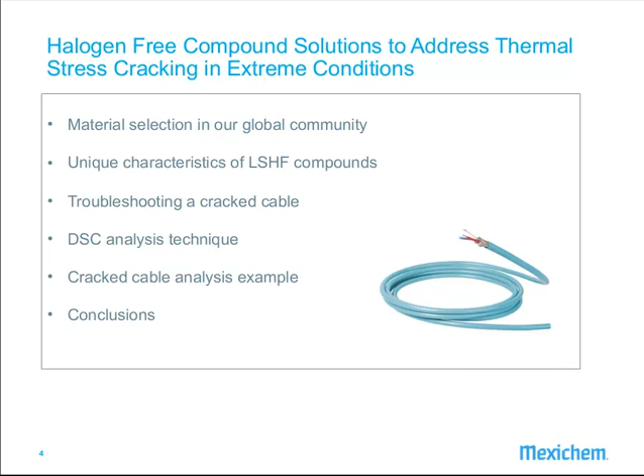So let's get started. Material selection. As all cable manufacturers are well aware, there are many global technical requirements, test standards, that the cable they're trying to make will have to conform to. These include British standards, Norwegian NEK standards, US Underwriters Laboratories, and London Underground, LULs, to name a few. There are usually similarities between these standards, and in some cases, harmonisation of standards, such as the European norms, EN specifications, are in place.

So I'm just trying to get things to move on.

For the cable manufacturer, there is a whole host of materials that could be selected for the cable compound application, such as PVC, elastomers, engineering polymers, and the subject of today's presentation, halogen-free compounds and others. Some of these materials, such as low smoke halogen-free compounds, are unique in the way they behave, and traditional or available equipment and processes may not be enough or even capable to fully realise the potential of that selected material's properties. Thus, understanding the nature of the chosen material is fundamental to fully optimise its properties.

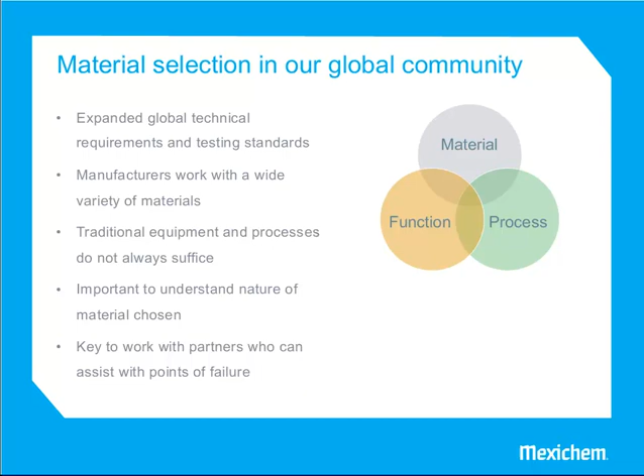Mexichem believes it's very fundamental to work with partners and suppliers who can assist with points of failure. After the title of this presentation, I would like to focus on low smoke halogen-free compounds. Now, we know that these materials do meet a whole host of global fire test requirements and other test criteria. They can be developed to match the performance of other materials such as PVC in terms of, say, processability and flexibility.

Depending on the end use of the environment that the low smoke halogen-free cables are chosen for, you have to choose a high performing compound to meet certain applications where they're going to be installed in arid or humid spaces. For such environments, these formulations must be robust enough to meet the requirements.

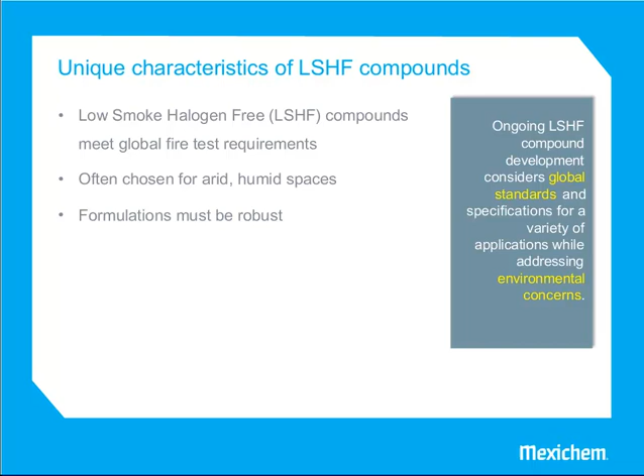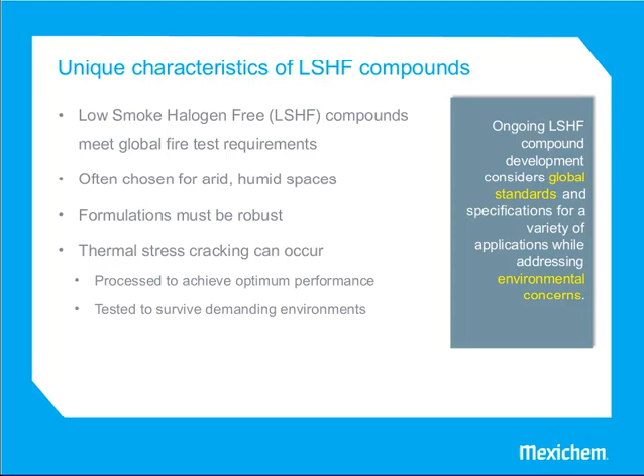One particular concern or requirement will be to address any thermal stress cracking concerns. So choosing a compound with improved thermal stress crack resistance performance is very important. And of course, all these cables, such as halogen-free compounds, will have to be tested to ensure survival in these demanding environments.

So for cables to be installed in extreme harsh environments where cracking could be a problem, the choice of the material, the compound formulation, is very important. That is, the material chosen must have property performance to satisfactorily withstand the extreme conditions that they need to perform in.

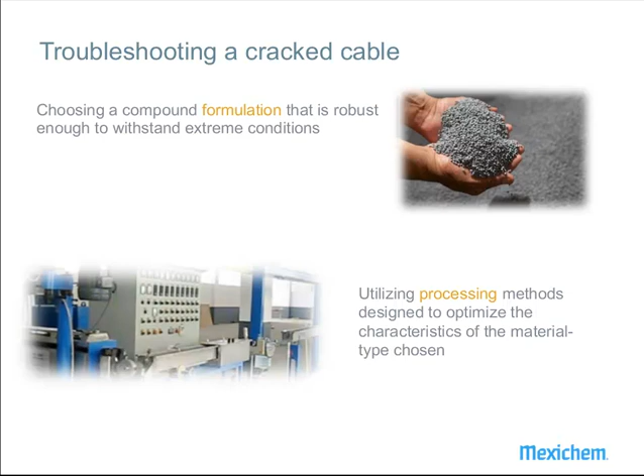Having chosen the best suited grade, a high performing grade, the manner in which these materials are processed is of key importance to be able to achieve the optimum performance of that cable in the field. So it's the right material to meet all the criteria of the end application, but the process method has to be optimized to the characteristics of that compound. So let's just discuss this point further.

Low smoke halogen-free compounds are generally highly filled with metal hydrates, flame retardants, so your aluminium trihydroxides and your magnesium hydroxides and calcium carbonates maybe. In the main, these low smoke halogen-free compounds will contain or be based on semi-crystalline polymer systems. Thus, halogen-free compounds will not behave like amorphous materials. This is a significant point in that they will have a much smaller processing window when you compare them with PVC.

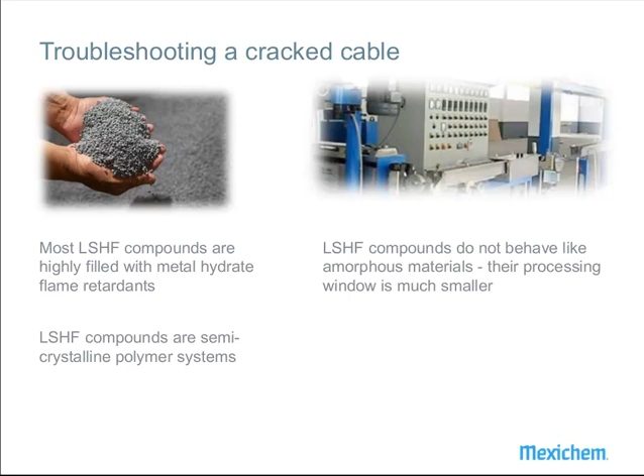So, let's recap what is needed for a material for a cable that is going to be used in the harsh environment. Well, cables installed in this environment will more than likely be designed to consist of steel wire armouring or steel wire tape wrap.

These cables will be installed in harsh and hot environments with temperatures reaching 40 to 50 degrees C. And often they will require conformance to many British Standards regulations, which often have to meet a hot pressure test at 90 degrees C. So we're talking, i.e., cable specifications such as LTS1 and LTS4 types as described in BS 7655.

So to ensure the material chosen is able to withstand the harsh environment described, one test, such as this one shown here, employed by Mexichem, is thermal stress crack resistance. This test uses the same equipment and preparation method as environmental stress cracking, with the exception that instead of placing the prepared samples in detergent, in Igepal, they are placed in ovens at different temperatures and the specimens observed over a period of 14 days to determine the temperature where no cracks occur.

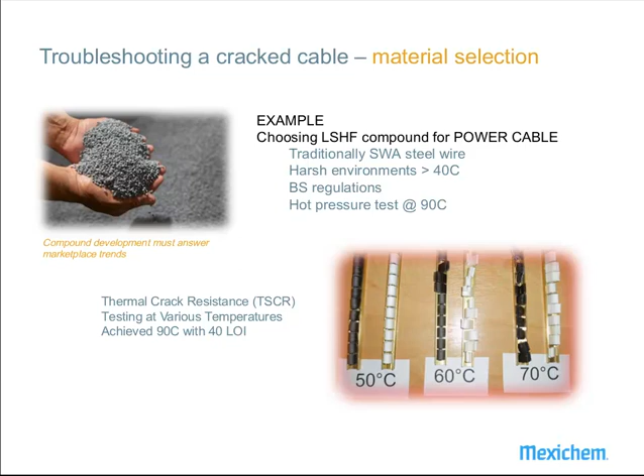So moving on to processing techniques. As we mentioned, the halogen-free compounds will be semi-crystalline in nature. Because they are semi-crystalline in nature, they can develop frozen-in stress if cooled too quickly or too rapidly in the cable making process.

What is happening is that the sheath or jacketing is drawn out to cover the core, and it is prevented from shrinking back and thus not attaining equilibrium. That is, the polymer is not allowed to obtain the crystallinity it wants to achieve. The stress level in the jacketing sheathing will then be greater than the strength of the polymers, which leads to cracking. In other words, equilibrium is prevented by the lack of chain mobility at temperatures below its melting point.

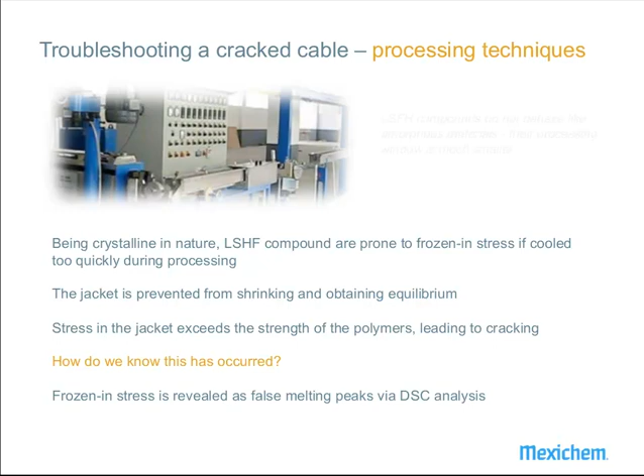You might ask, how can this be determined? How do we know that frozen-in stress is occurring? Well, we believe that frozen-in stress can reveal itself as false melting points and peaks using a DSC analysis. DSC analysis is a differential scanning calorimetry thermal analysis technique.

We have found a process of heating the cable material beyond the melting points of the polymer, then cooling it at a very slow rate to ensure equilibrium, and then doing a reheat. The graphical representation of the cycles will reveal differences between initial and subsequent heat cycles. These differences indicate that changes or optimization need to be made to the processing technique.

With the low smoke halogen-free compound, we believe achieving equilibrium during the processing would lead to cracking in the field being avoided.

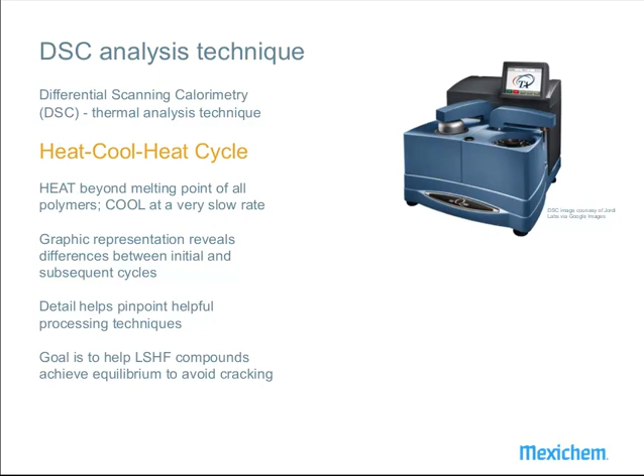I would now like to go through an example where this analysis has helped us to work with our customers or cable manufacturers to obtain good performance in the field. Our analysis was done on 3 cable samples. Cable 1 is a good cable with a small diameter and thin wall.

This cable has been consistently good in the field and no failure points have been raised over 4 years of using this cable's size. Cable 2 is a good cable again, but this time it's a larger diameter with a thicker wall. No cracking issues have been reported with this one. Cable 3 is the same cable design as cable 2, but in this case there was a failure point raised with this cable.

Here at the bottom of this slide, I have shared with you the test method that we use for our DSC analysis. We heat a piece of the jacket from room temperature to 200 degrees C at a rate of 10 degrees C per minute. We then slowly cool it at a very slow rate from 200 to minus 25, moving at 5 degrees C per minute.

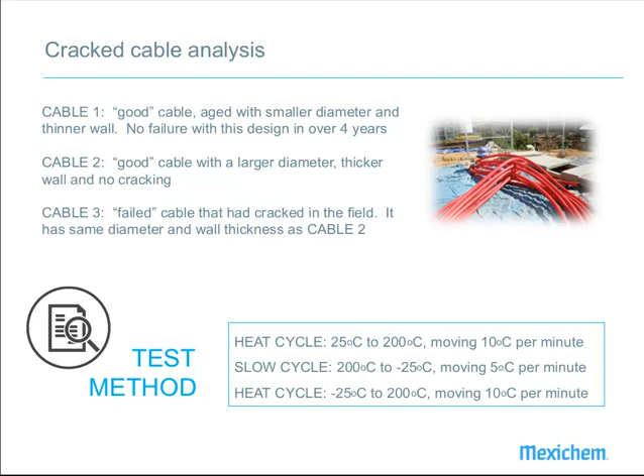This slide shows the graphical representation of the DSC method on cable 1. The blue dashed line is the first heat cycle, the green line is the cooling cycle, and the red solid line that you see there is the second heat cycle curve. When we reviewed this, we can see that the blue line overlays onto the red solid line.

This indicated that the halogen-free compound was processed well and did not contain significant frozen-in stress levels. This outcome is most expected as this was a good cable. Obviously, the smaller diameter and thinner wall made it easier to cool slowly, which allowed the material to reach equilibrium and was then free of significant stress levels.

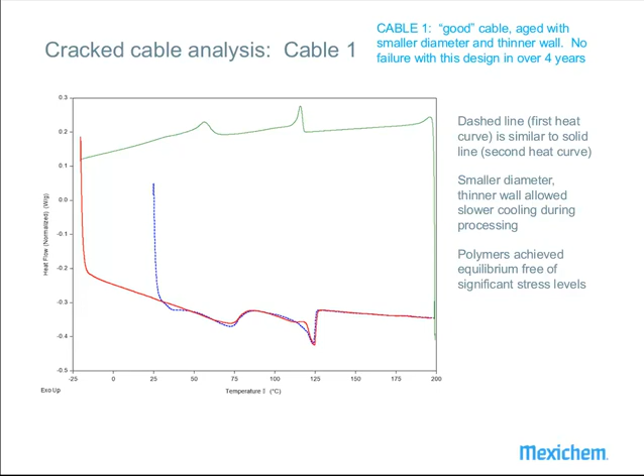On this next graph, we again have the DSC heat-cool cycle for the larger diameter cable, which had not encountered any issues in the field. Here we see similar behaviour to cable 1. The dotted blue line is overlapping the red second heat cycle curve. Again, this would indicate this is a cable that had been processed well and did not contain significant amounts of frozen-in stress in the main.

Although the cable was identified as good with no crack issues, you can see between 35 to 70 degrees C there is some small disparity between the curves. This would suggest that small opportunities to optimise processing could have been done. A thicker jacket wall is obviously more difficult to cool slowly and uniformly.

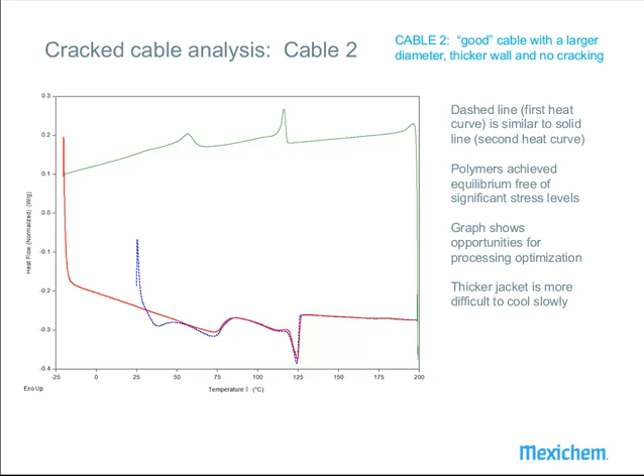Now we turn to the last cable under review. This is a cable that had some cracking issues in the field. This time, when we look at the dotted blue line and the red line, large differences are revealed. The true melting behaviour of the jacketing halogen-free compound is revealed in the second heat cycle.

This heat cycle appears to have multiple false melting points, which are significantly large or different from the subsequent heat cycle after cooling and equilibrium had been optimized. This is a good indication that frozen-in stress is present.

Now, some of my listeners are maybe good analytical bods, very experienced in analysis via DSC, and having in-depth experience of them. You might be wondering if the false melting points are self-produced by the slow heat cycle rate.

I would generally be in agreement with this hypothesis, except that, as I said earlier, halogen-free compounds are highly filled, and I believe that the DSC heat cycle would not give the polymer enough mobility to create these false melting peaks. In less filled systems or pure polymers, there would be adequate time and space for mobility of the chains to create these false peaks.

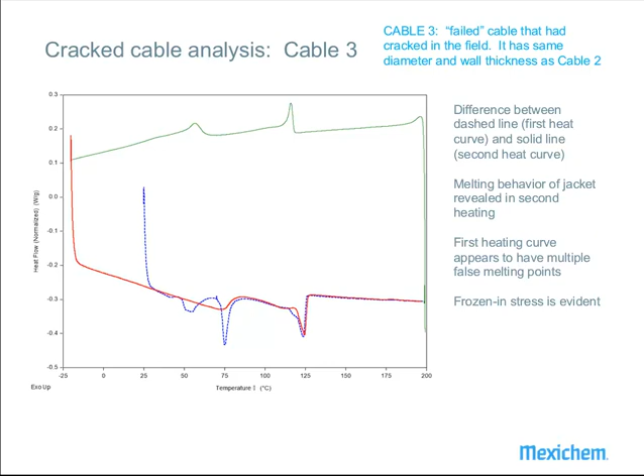So, based on this DSC analysis, Mexichem concluded that the failed compound cable that had cracked in the field had indeed contained frozen-in stresses. Once discovered, a technical support trial was undertaken, and during this, recommendations were made to cool the cable as slowly as possible during production to minimize frozen-in stress.

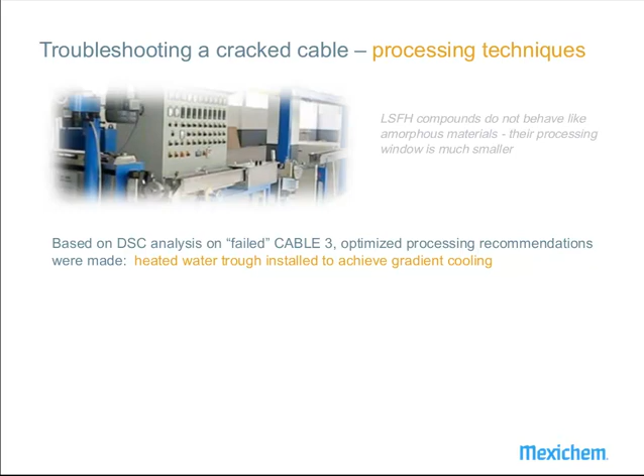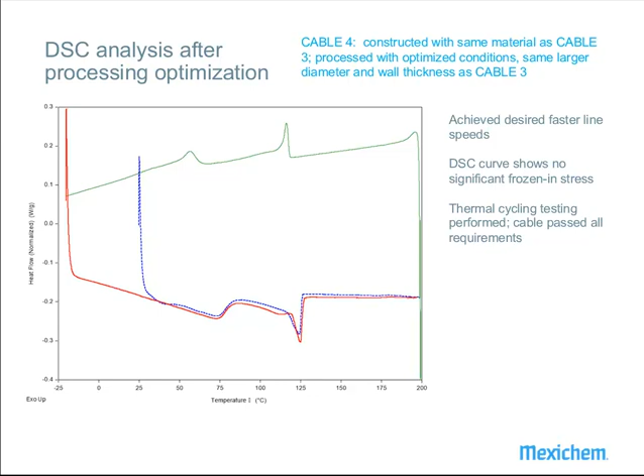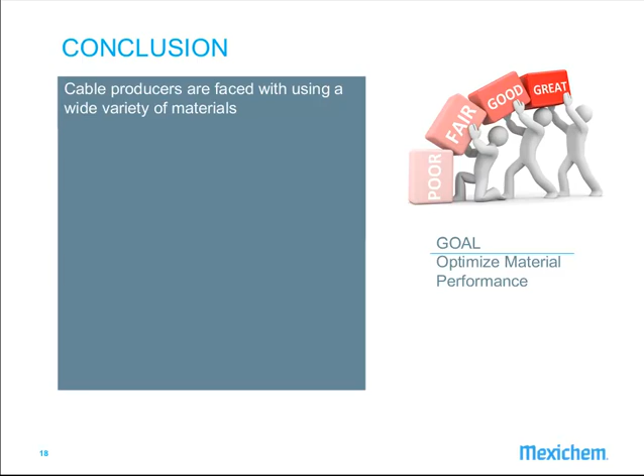So, in conclusion, low smoke halogen-free materials are appropriate for a variety of cable applications. More and more developments are coming along to further meet demands of cables installed in harsh environments and the requirements that come with them.

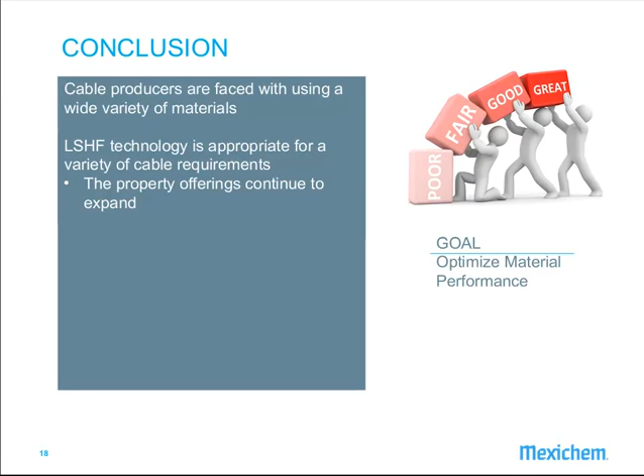Once a cable is identified to meet all the physical attributes required by the cable standard, then an understanding of a particular and peculiar processing behaviour is needed to be able to optimize processing. As the market of low smoke halogen-free compounds continues to grow in different cable designs and environments, cable manufacturers are faced with improved field performance and optimized processing techniques.

Working with suppliers with in-depth knowledge about available polymers and analysis methods, I think this is an invaluable tool to help with fully realizing the material's properties to help with the demands of the widening wire and cable market.

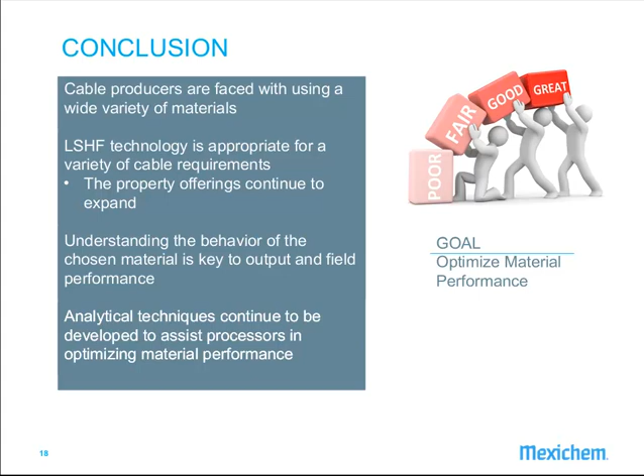Again, I'm not 100% on the question, but if we talk about stresses on cable extrusion, what I would be looking for is the tooling design, the actual die and core or tip that is used, whether these are giving an acceptable drawdown ratio for the cable and the material being made. So those could also create the stresses. If you were to use a larger die, that would give a higher drawdown ratio, and you're going to create stresses in the cable that way as well. Okay, thank you. Next question.

Is there a simple test that can be done at processing to verify that a cable made meets the stress-free environments?

A simple test would be the DSC method, done at processing, a simple test. The answer would likely be no, because in this review that we did with this cable manufacturer, the cable was tested for all its other parameters and was released with no problems. What couldn't be seen was the stress levels, and only by the DSC method were we able to realise that. So not as I know is the answer.